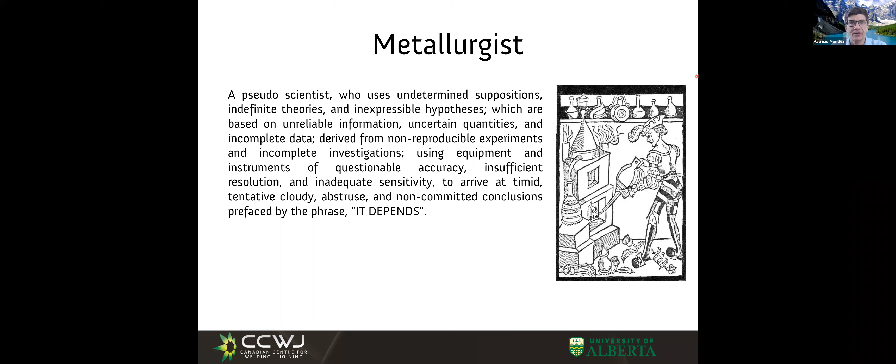So let's start by acknowledging we're treading into a new territory in which ambiguity and poor accuracy are pretty common, and still we accept them and we get very, very important results from that. So I want to start talking about metallurgy with something that sometimes is a common misconception. As a mechanical engineer, I was taught that 4140 steel would have so many megapascals of strength. And it's in books and things like those. But that is not true. It's true sometimes and sometimes not, right? It depends. And that's what drives people like mechanical engineers crazy.

Because a material, when we define something like 4140, or we give it whatever name, a P1, whatever it might be, that material has a certain chemistry. But the chemistry is only the beginning. A chemistry is like defining a book by saying it's made out of sheets of paper. But what is written in that book is going to be very different from one book to the other. And in a metal, even if you have the same composition, you can have different microstructures. And this microstructure is going to give you the properties.

So let's start. For some of us in materials, this is self-evident. For some others, this is kind of a big revelation: this steel with this name does not have a defined property. It depends whether it's quenched and tempered, whether it's annealed, and so many other things you can do. And because in welding, some parts are hot and some parts are cold, and some welding procedures are hot for long and other welding procedures cool down fast, the same material with the same first and last name is going to have very different behavior. And that's where we are going.

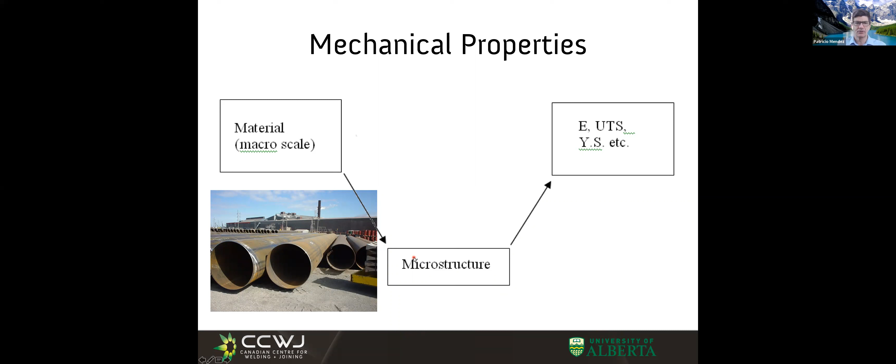So the fact that we can name a material doesn't mean that we know the properties. We have to know the microstructure. Very, very important: what the material looks like in the microstructure. So what are the levels of microstructure? Well, let's start with an atom. I'm not going to go any finer than an atom, but I think an atom is fine enough for our purposes, right? In the end, we're welding bridges.

Now, the atoms, for those things of God, it is that way, and we have to accept it. If you put a bunch of atoms, they don't scramble randomly. They organize themselves. If you want, you can call it self-assembly, which sounds very high tech. But that's what happens. You put a bunch of atoms and they themselves decide how they're going to arrange. And that's what is called the crystalline structure, the crystal cell. For example, here we have something that is called BCC. And I believe all of you went through an introduction to materials science. Now, these multiple cells, these multiple local groups, create a grain.

And here we have a structure of what it would look like in this drawing. That is what you see in a microscope of a metal. Inside each of these polygons, everything is arranged, whether it's BCC or FCC or whatever it is, but the atoms are arranged in a particular crystalline structure. To some extent, the crystalline structures are like streets and avenues, because in this crystalline structure, depending on the angle you look at them, they might look all lined up. And in each grain, all the atoms are lined up in the same direction, but different grains can have the atoms lined up in different directions.

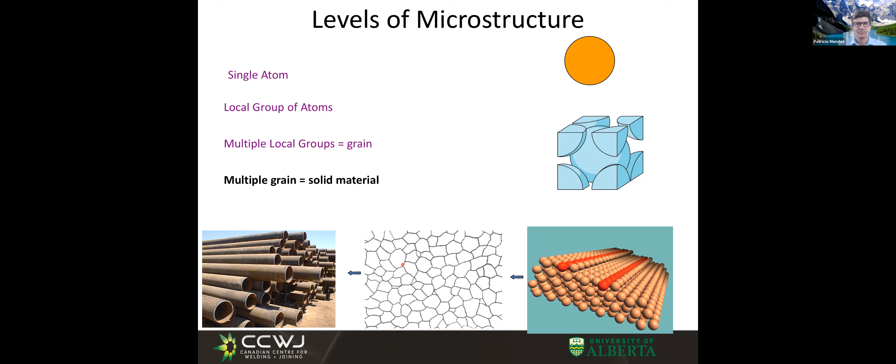And when atoms have somewhat higher energy, this energy can be used for things, from corrosion to mechanical properties. Now, we went from one atom, and a bunch of atoms gives us a crystalline cell, a bunch of crystals, right? And even if the material is the same in chemistry, this arrangement of atoms, whether they arrange like FCC or BCC or whatever it might be, and whether we have big grains or small grains or elongated grains, all that is going to change very much the response of our material. And that's quite amazing. We call it the same name. We can call it 4140, but I can give you pretty much any property we want on that material. We cannot assign a property just to the material name.

So let's talk about steel. And before we talk about steel, I want to talk about pure iron. So we have here what is called the iron-carbon phase diagram. All of you have seen it before; for some of you, it's old news. For some of you it might trigger some traumatic memories, right? But this is a map. This is just a map.

In the horizontal axis, 0 means 0% carbon, which means 100% iron, pure iron. And as we move to the right, I add more carbon and more carbon as an alloying element. And right now, I'm not adding any other alloying element, just iron and carbon. And by the way, this is so useful, but nobody does that, for a number of good reasons. Nobody has only iron and carbon. But this diagram represents most steels that are welded. So if we look on the left where it says 0 in the horizontal axis, that's pure iron. Let's look at the vertical axis. It says temperature. And these different parts of the map, these different countries in the map, would be the different ways in which the crystalline lattice can be arranged.

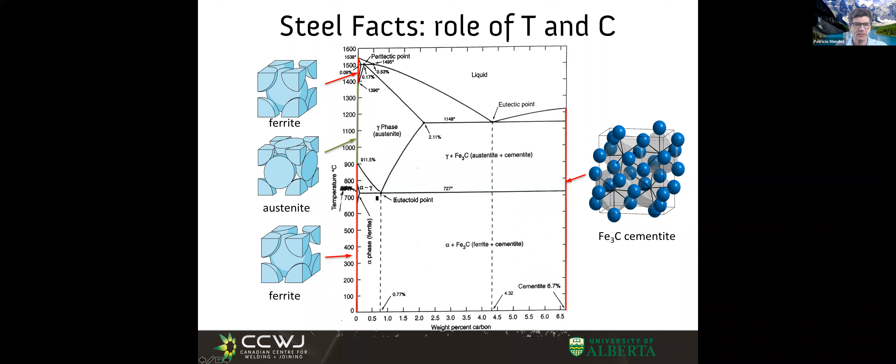And when we cross it, all of a sudden, what we have is ferrite that can take very, very little carbon, and we have cementite. And those two are mixed. What comes out of here has one of these mineralogic names called pearlite.

So here I put some photos, and they are not all photos of the same steel, but they are representative. Let's talk about a steel that has 0.2% carbon. That is a very common amount of carbon in structural steel and pretty much everything that is very weldable. It sounds very low, but to give you an idea, 0.4% carbon is high. More than 0.4% carbon is really high. And 0.77% carbon is crazy high, right? You don't make many structural elements at eutectoid composition.

So let's use our iron carbon phase diagram. I made this vertical line that corresponds to 0.2% carbon. So a given steel will live on this line. It can be hotter, it moves up, it can be colder, it moves down, but the steel is on this railroad track and is 0.2% carbon. Let's say we're at point 1. That means we have this steel that is at 1050 degrees there.

What does a steel look like at this temperature? Has anybody seen steel at 1000 degrees? I'd like to see in the chat if anybody tells me what this steel looks like when it's at 1100 degrees or 1000 degrees. Yeah. It's bright orange, starting to verge into white, and of course it's malleable. It's beyond orange. It's a very, very bright orange, very bright yellow, right? That's what it looks like, but it's still solid.

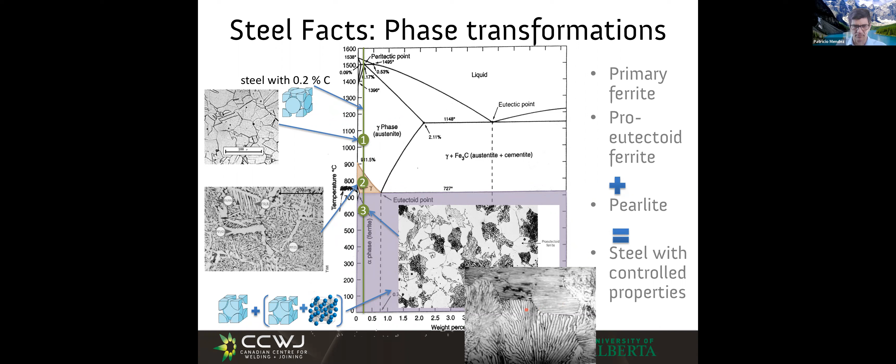So we talked about the effects of temperature, and we talked about the effects of carbon in carbon steels. For some of you, I'm going so slow. For some of you, I might be going at the speed of light. For those of you who think I'm going slow, please bear with me, because I want to bring everybody on board with the class. For those of you who think I'm going at the speed of light, please take a look at your introductory material science books. And if you don't have any or you don't know where to go, I can make some suggestions.

You don't need to relearn a whole course, but some basic concepts, like I mentioned, you need to know, because that's the way you understand what's happening during welding. All right, we talked about effect of temperature, and we talked about effects of carbon. And we talked about how when we cool down, we could have different types of microstructures happening.

What I didn't say before is that it doesn't happen instantaneously. If I say, okay, all of you iron atoms, rearrange from FCC to BCC, the atoms are gonna say, you know what, I need some time here. Sometimes the time is fast, sometimes the time is slow, but it matters. It's never zero. So what gives this time? What decides this time? And as I explain this to you, all of a sudden it's gonna make so much more sense about steel alloys and problems in welding.

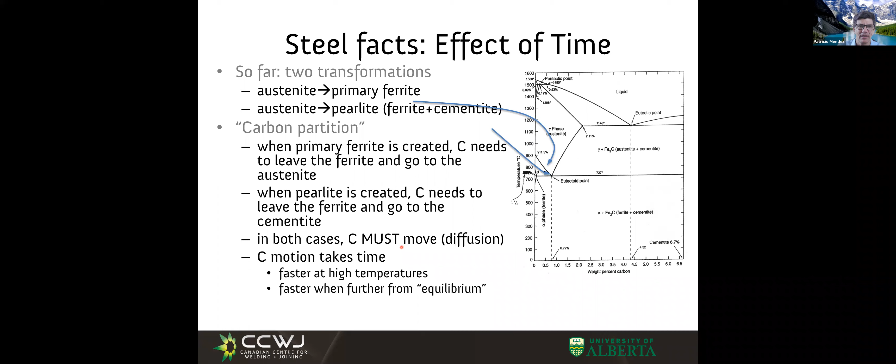Fast, of course, right? So now you start seeing, and we are only starting the conversation, a coarse microstructure takes long, fine microstructure takes short, but transformations at high temperature can happen fast, and transformations at low temperatures happen slowly. We start to put together some very important concepts that explain hydrogen cracking, explain why we can mess up a weld with the wrong heat input. So if you bear with me, we go little by little. So let's discuss this effect of time.

And I want to start discussing effect of time with pearlitic steels, the ones that pretty much nobody welds, although we have a project in the lab right now welding these steels. These are the steels that you use for making railroad wheels or railroad tracks. And let's say we have that steel, and I want to propose an experiment. And the experiment is this. In this vertical line that represents the alloy, we are going to austenize, or austenitize.

I think the proper term is austenitize, but nobody says it like that. I'm going to austenize things at 800 degrees. So it would be here, full austenite for 1 hour. So I give time for all the carbon to diffuse. Everything goes back to austenite, single phase.

That is essentially, you have a lemonade, let's heat up the lemonade and it can suck up so much more sugar, right? So that's what we do. All the sugar is in solution in our lemonade, and all the carbon is in solution in our austenite. Then we're gonna cool very quickly, but we're not gonna cool down to room temperature. We're gonna cool down to different temperatures of my choice.

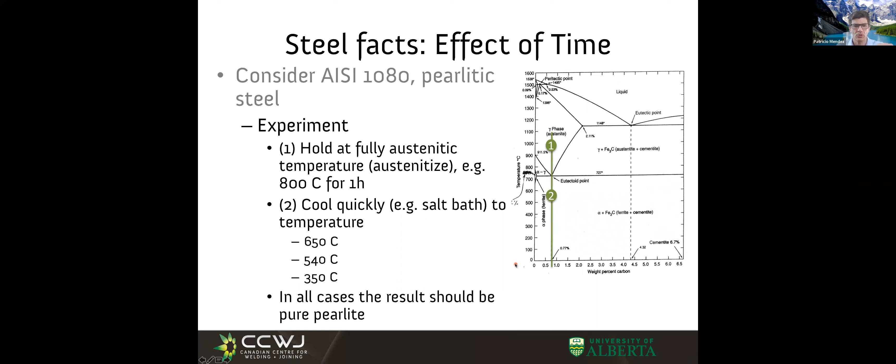So let's see what happens if I cool down and hold at that temperature. Cool quickly, I know that at the start it should be austenite. In this graph, to represent the effect of time, the horizontal axis is time and the vertical axis is percent transformed. Time 0 is the moment I put it in my quench. Because the atoms take some time to transform, I have 0% transformed. So this means 100% austenite at the very beginning, the instant in which I quench.

And then I wait. And what do I see? Well, if I wait long enough, I'm going to have 100% pearlite, that I know. And at intermediate times, and people measure that, we have the machines to measure that in the lab, we see how we go from 0% transformation, the transformation gets faster and faster and faster. And then as the transformation reaches completion, it slows and goes asymptotic towards the top.

And so we can define somewhat arbitrarily the start as when I see that something has changed, or I can define it as 1% change. There are so many ways to define the start, and same with the finish. And people wouldn't agree, and they have big fights, and they write papers hating each other. But let's all agree there is an arbitrary start that can be 1% or defined in a number of ways, and a relatively arbitrary finish.

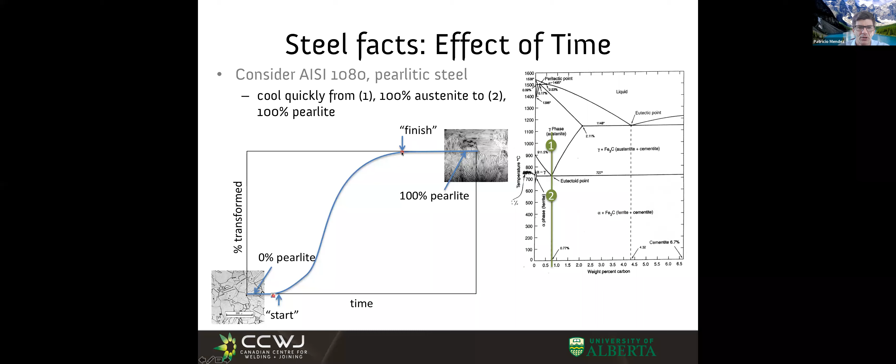People typically call the start when, with whatever is measuring, you see a change, and the finish when, with whatever you're using to measure it, you stop seeing that change. And that took some time. We're gonna call this the start time, and we're gonna call this the finish time. Very important concepts.

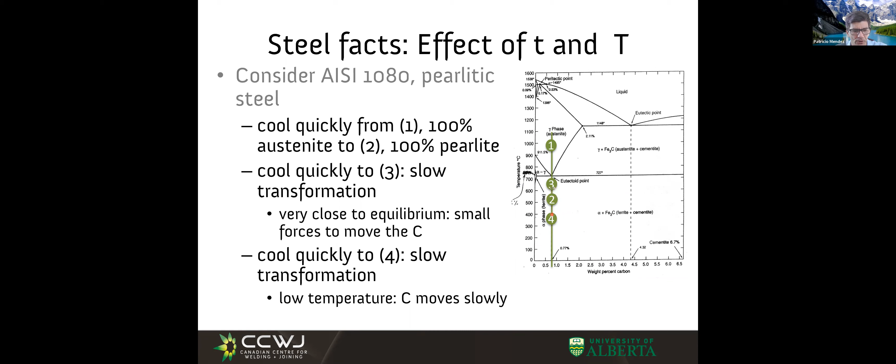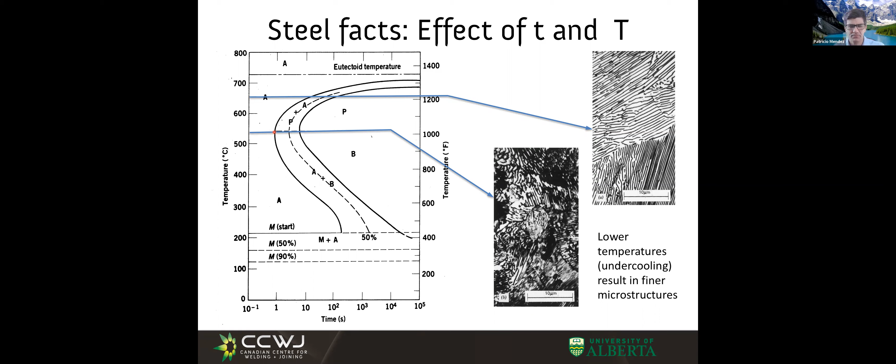So I want to consider something else. In this graph, we hold at a temperature, which we don't do in welding, but this will help us understand. We hold in this very contrived experiment at a temperature. We have start and finish time. Because you have this diagram, for every temperature you choose, I can give you a start and a finish time. If I'm above the transformation temperature, nothing's going to transform.

But what happens if instead of quenching my piece of steel in my molten salt, I quench it in water to room temperature, right? And this happens very fast. Well, what happens in that case is super interesting. If I quench it very fast, like the way you quench the swords in the movies, you make the sword and it's red hot and you're banging on it and you put it in water. What's happening is amazing.

The carbon doesn't want to be in the ferrite. We already discussed there's no room for carbon in the ferrite. The carbon wants to go to the cementite, but it needs time to get out of the ferrite and into the cementite because of diffusion. We already discussed that. And we said, okay, if we have shorter times or lower temperatures, we need shorter distances. But what if I cool so fast that there's no chance? In that case, the carbon has no escape.

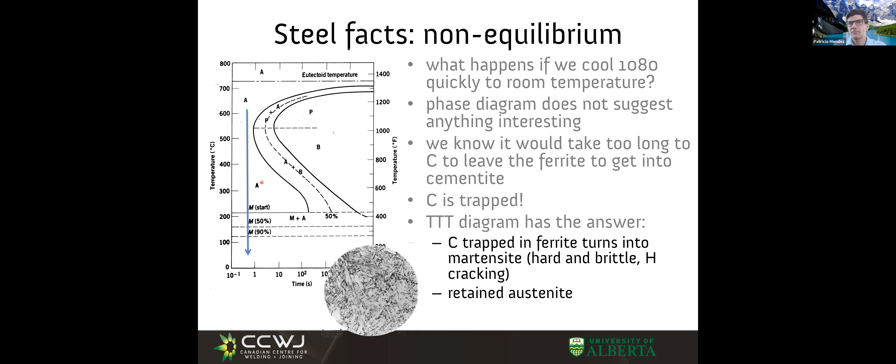So now you know start time for a transformation, time to finish a transformation. You know how those times to start transforming depend on temperature. And you also know that if you cool too fast, you cannot transform by diffusion, and you transform in a way that does not involve diffusion. That is martensite. In martensite, the carbon is essentially not moving.

And now that I taught you, I can have a start of transformation and an end of transformation that ends up in pearlite, coarse pearlite on top, fine pearlite at the bottom. And then if we go crazy and quench to room temperature too fast, we have martensite. But what happens in welding most of the time is none of those. The structure that relates to welding the most would be reproduced in this experiment as follows.

Let's quench in our salt bath, but let's quench to about 275 degrees, that would be this height. So I quench very fast, but I don't reach the start of martensite. I do not transform to martensite, but I hold it. Now, because I'm holding it, it is taking long to transform, because at low temperatures we have very slow diffusion. It takes very long to start to transform, takes very long to finish transforming, right?

Like, look, this is more than 100 seconds to start transforming. At this temperature, I could start transforming at 1 second. So depending on the temperature, I can transform in 1 second or in about 2 minutes. Same material. And to finish transforming, these 10, 1000, this would be about an hour to finish transforming, while this other guy finished transforming in 10 seconds.

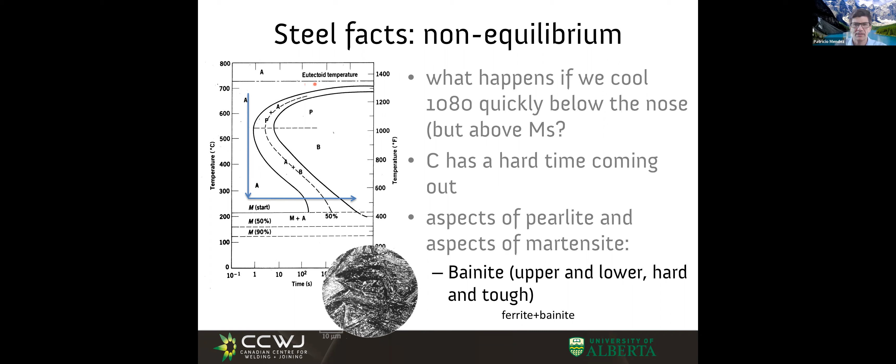Now, if we close our eyes, we're in our shop, we have our furnace to heat things up to 800 degrees for 1 hour, which means I'm going to dissolve all the carbon, and the austenite is all one happy phase. This is like heating up your lemonade so it dissolves all the sugar, right? You don't want to drink it hot, but the sugar went in for sure because it's hot.

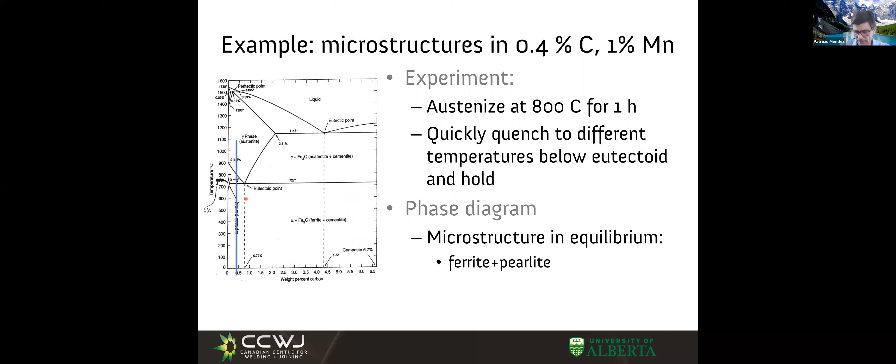If the lever rule you don't remember very well, or you don't remember very well how to operate with phase diagrams, take a quick look. This is very basic. So we're gonna be using this concept. So primary ferrite and this austenite turns into pearlite. That's what we should expect. So let's see.

And what do we see? At this temperature, nothing is transforming. If I do a quench to this other temperature that is just above the A1 line, the line at which no austenite could exist, just above that line, what do we see? We see that we would have transformed primary ferrite.

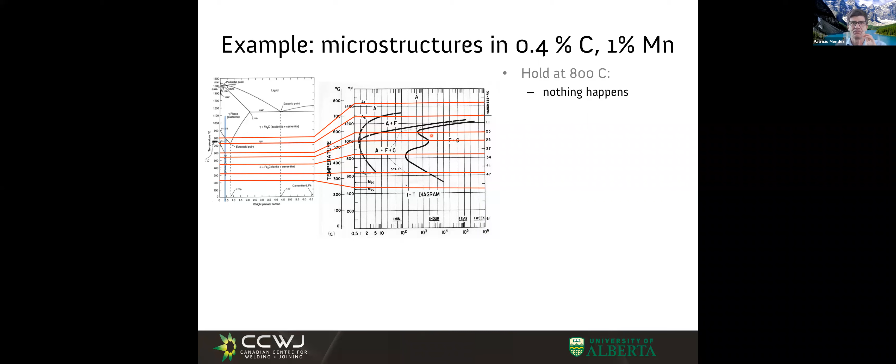We have talked about start and end times, and now we have start and end, but we have start of primary ferrite, then start of bainite, in this case start of pearlite, and then end of transformation. It's a little bit more complex than before. It's the same thing, but we keep adding concepts. And still, please stay with me, because this introduction is essential for us to understand welding.

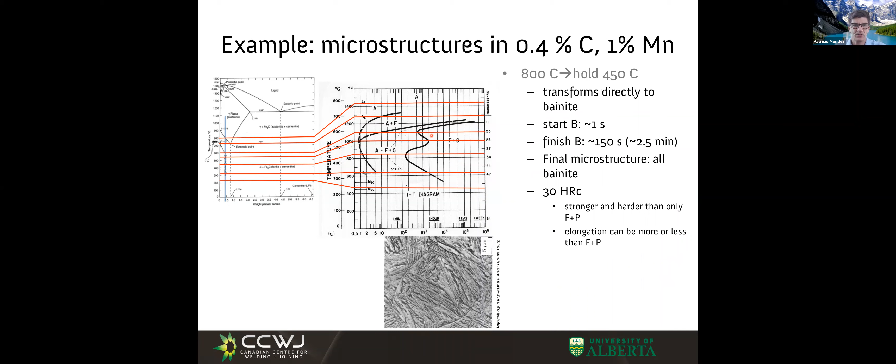So, okay, I had some images here, but the notes are uploaded, right? And we talked about the martensite. So what have we discussed so far? We have discussed the effect of temperature and the effect of carbon in our steel. We have also discussed the effect of time, and how when we start transforming and when we finish transforming depends on what temperature we're talking about.

At high temperatures, we have low driving force, so we start and finish late. At low temperatures, we have huge driving forces, but diffusion is very slow, so we start and finish late. But there's some intermediate magic temperature at which diffusion and driving forces are kind of all in the sweet spot, and we can start and finish quickly. And this gives us different microstructures.

At high temperatures, we have coarse microstructures because at high temperature diffusivity is fast, and we can afford the long distances. At low temperatures, diffusivity is slow, and we cannot afford the long distances, and microstructures are fine. When we go crazy all the way, quenching down to low temperatures, then the carbon has no chance to diffuse out and is trapped and is unhappy.